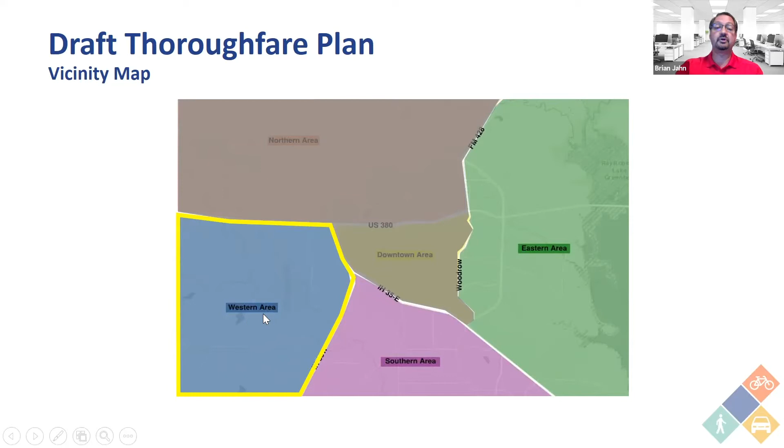Just a quick overview of the mobility plan update, what it is and what it isn't. It's 3 plans in 1. This is the first true mobility plan the City of Denton has undertaken, including the thoroughfare plan, which is primarily for vehicles, the bicycle plan, and a new element we have not had before, a pedestrian plan. The thinking behind rolling these into one plan is that they all connect at some point - people walk to a bus stop or walk to a destination.

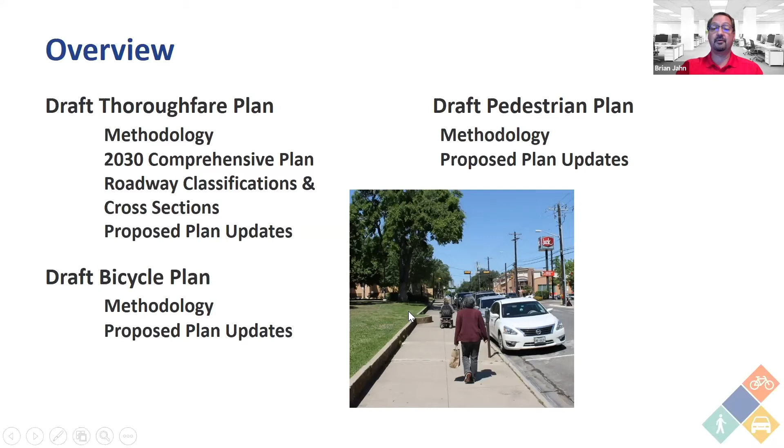All of the modes are interconnected, and it falls in line with the city's desire to move forward with a more complete streets oriented plan, so we see all 3 modes plus transit on the same plan. We try to update this plan every 5 years just to keep it current, as development changes and new opportunities arise. Again, we're including the bike and ped plans.

The primary focus of this mobility plan, and the thoroughfare plan in particular, is the reservation of right-of-way. We are trying to identify where we think future roadways need to be, and how big we think they need to be. As development occurs, we can secure that right of way, secure those infrastructure needs, and help build out our ultimate roadway, bikeway, and pedestrian plan.

It also positions the city to receive funding when the Texas Department of Transportation or the North Central Texas Council of Governments issues a call for projects. Having this plan in place and possibly having secured that right of way puts us in a better position to promote a specific project and secure funding from that third party. So each plan will focus on safety - that's always our number one priority.

We looked at providing better connectivity in this plan than the 2015 plan, again with that complete streets approach, trying to provide more multimodal options: pedestrian, bike, transit, in addition to the historically auto-centric thoroughfare plan. So let's jump into the thoroughfare plan and its process.

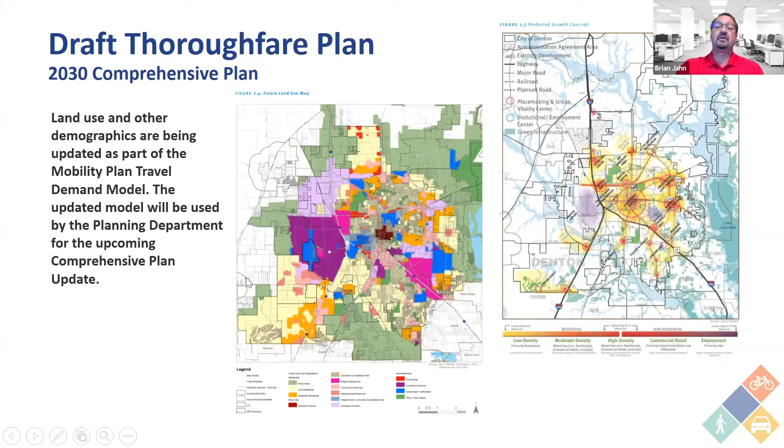So this is the kind of nerdy engineering portion. Just a quick introduction on how we develop our thoroughfare plan and its modeling process. We divide the city into little bitty zones, and each zone has population and employment estimates for, in this case, a 2045 build-out scenario. So we're looking at 2045 as our scenario of interest. Again, 25 years in the future: how many people will live here, how many jobs will be in place, and we divide that and disperse that across the city.

And then we turn that population number and those employment numbers into trips. So how many people will be entering a zone, how many people will be leaving a zone, either coming home or going to work, et cetera. We distribute those trips on the roadway system, and we get a lot of guidance from the North Central Texas Council of Governments. They have a regional model that is much higher level, so we really drill down into the weeds when we're looking at the city of Denton, and we'll distribute those trips between the different zones and externally.

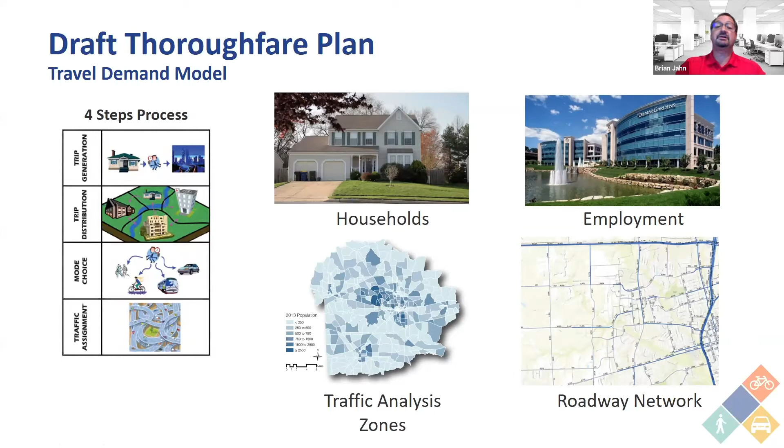So some people may live in Denton and work in Frisco, and we try to capture that. We will then determine an estimate of the mode choice. Are they going to take transit? Are they going to drive their car? Will they be on a bike? Will they be a pedestrian? Then we assign those trips onto a travel forecast model that we have built, representing all of the city streets in Denton. Again, we have the ability to tie into the regional model so that we can capture regional ingress and egress as well.

The next category is primary arterial. This is something like a University or a Carroll. It could be owned by the city or by TxDOT, but it's more of a city street appeal and description rather than a freeway or a controlled access facility. So you'll have traffic signals and intersections, you might have on-street parking. It could be 4 to 6 lanes wide, carrying 25 to 50,000 cars a day.

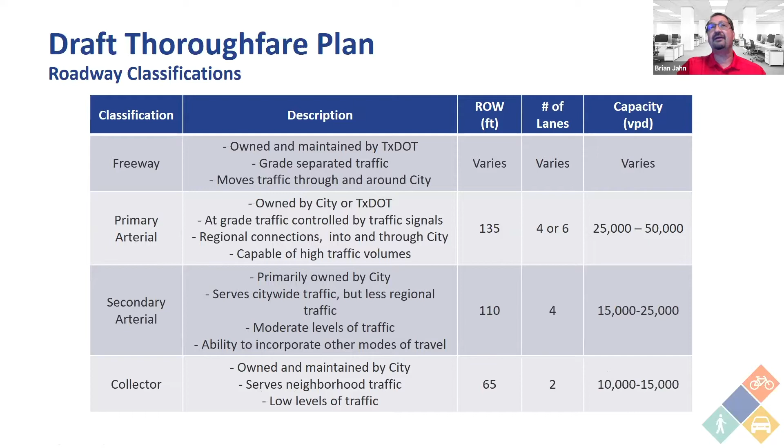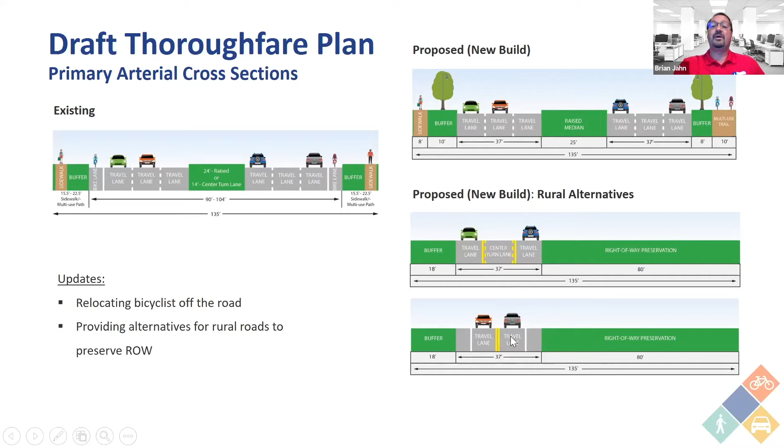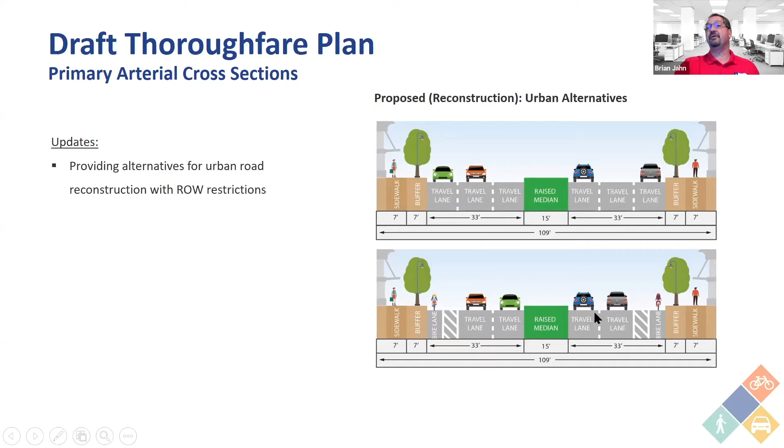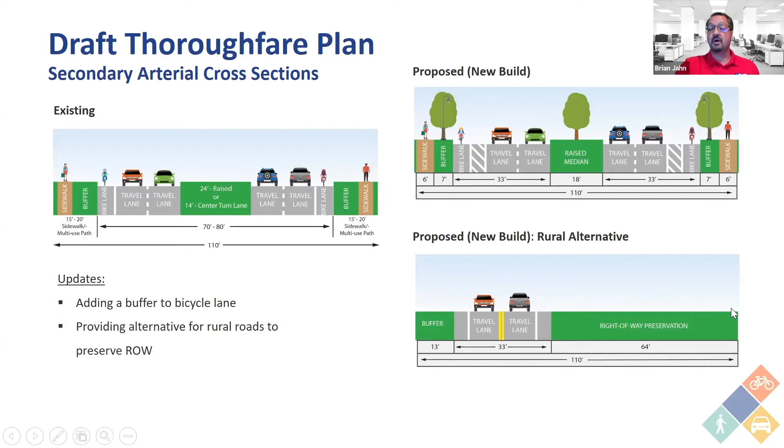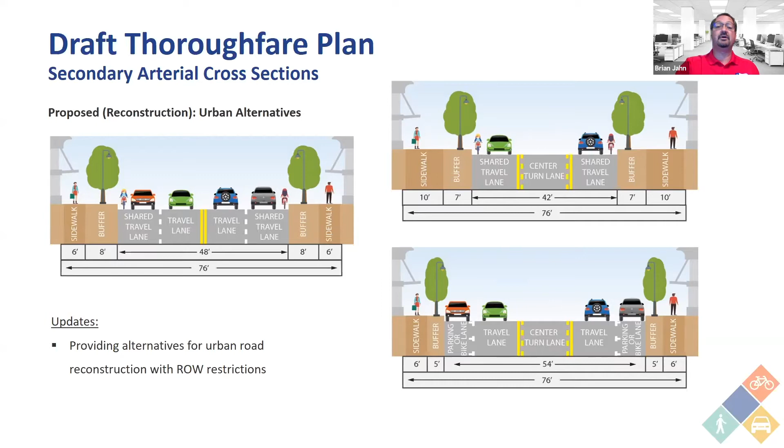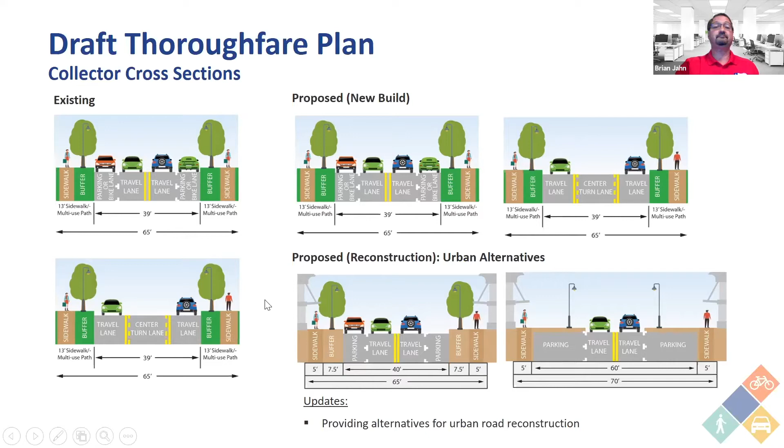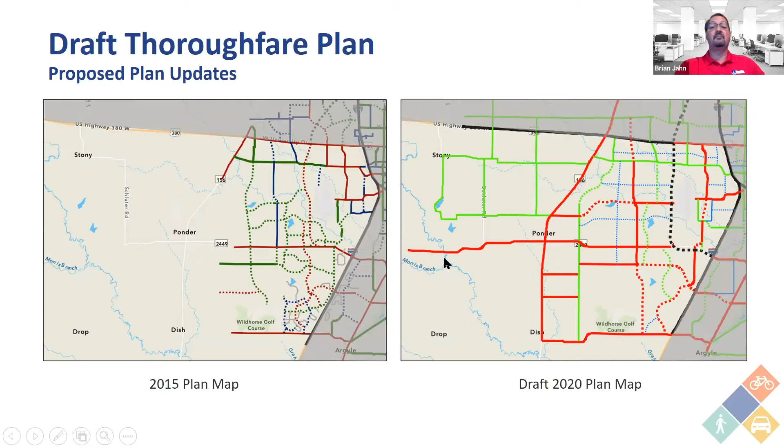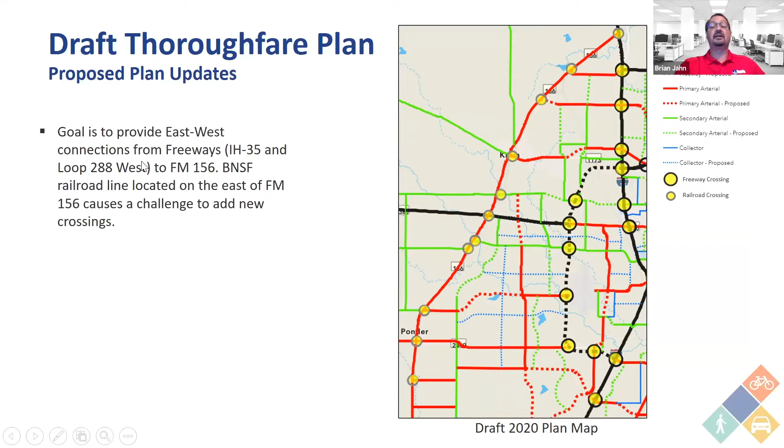What we'd like to do is go through some of each of these areas - this is showing some of the additional network that's outside of the city, in our ETJ or in other communities - just looking at what the total network is on the west side of the city. I'd like to go through a couple of these, and there's 8 of them, so we're going to go very quickly, just the highlights, the major changes that are occurring in this plan versus the 2015 plan.

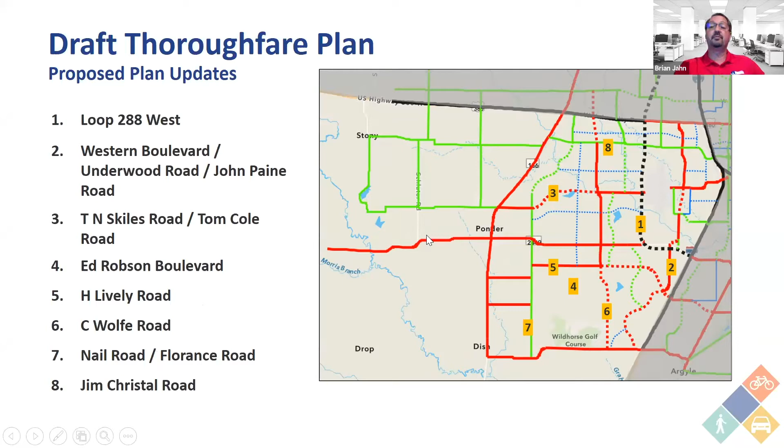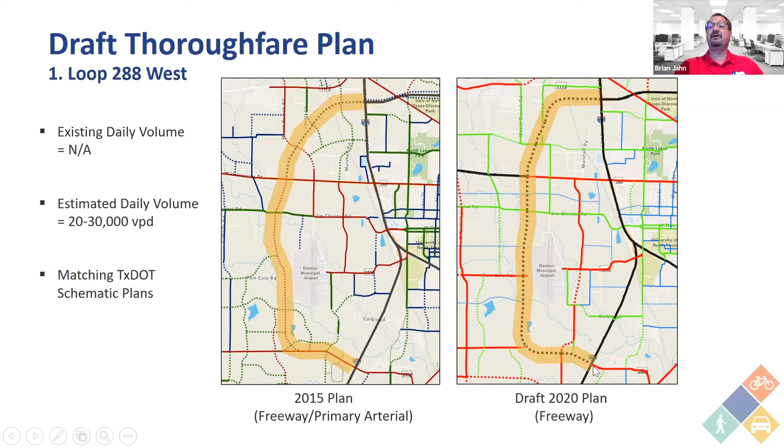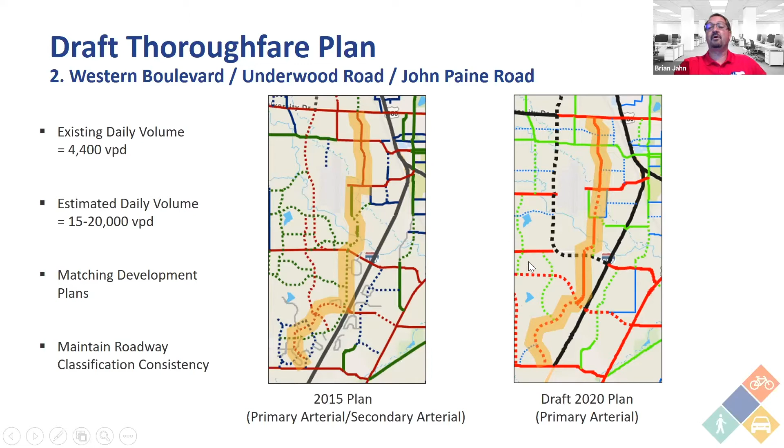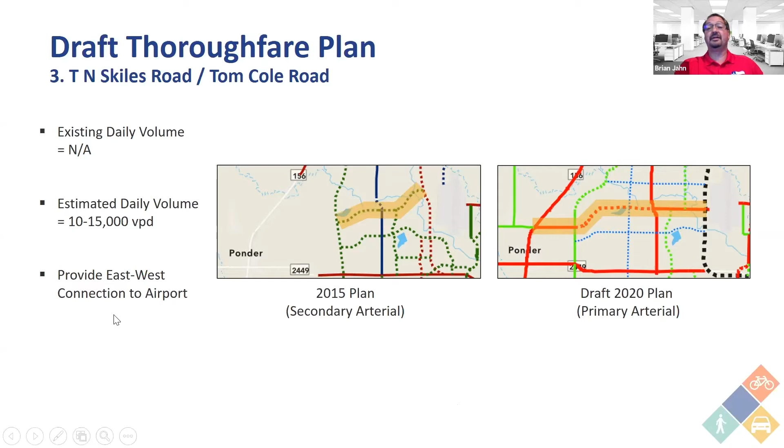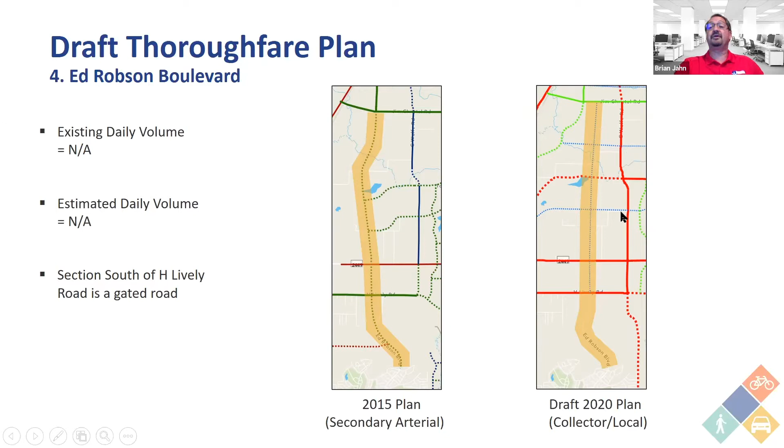Ed Robson Boulevard - in the 2015 plan we had this shown as a secondary arterial, but because in the 2020 plan, and we'll talk about this in a bit, C Wolfe is showing as a primary, then we're downgrading Robson Boulevard to a collector and local, because we've got the extra carrying capacity on that roadway to the east.

H. Lively Road - a lot of this is out in the county and in our ETJ, but in the 2015 plan we're showing that as a secondary arterial. We've realigned it slightly, just straightened out some of the curves, going between 35 and points west. We believe this corridor should be a primary arterial instead of a secondary, and so we're classifying it as such.

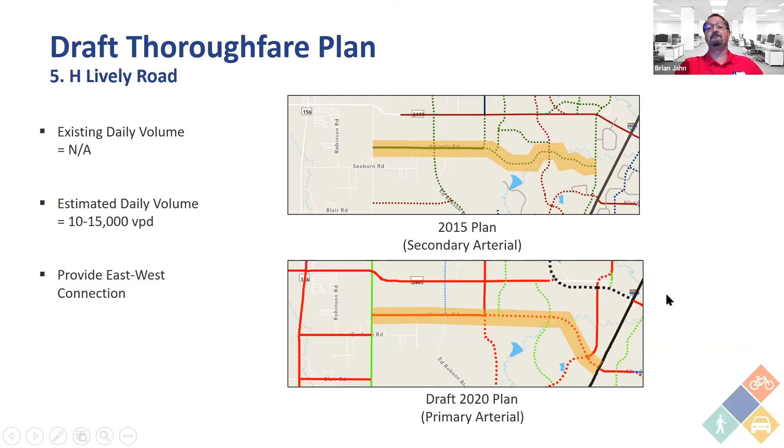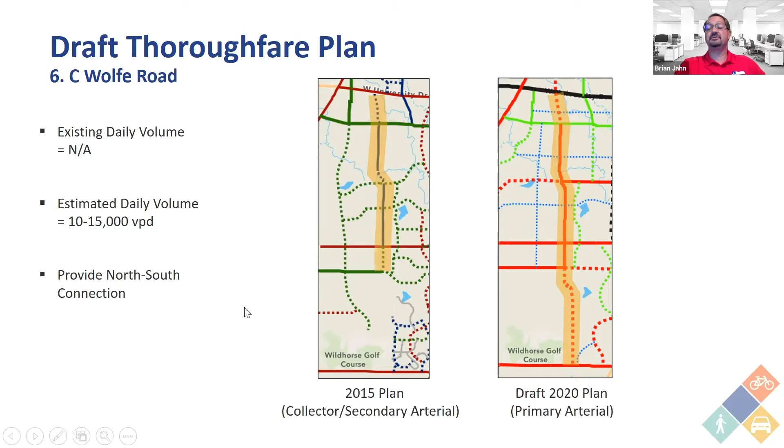C Wolfe, this is the north-south arterial that in the 2015 plan was shown as a collector or secondary. We've extended the reach all the way to the south, and this is associated with some of the Hunter Cole development, but reclassifying that as a primary arterial just because of the estimated volumes that we think will be generated and attracted to that facility.

Nail Road, Florance Road - again this is pretty far west, but we've kept that as a secondary arterial. The difference here is that we've realigned it to the west and extended it further south.

So again, trying to clean up some of that, adding that connectivity that the 2015 plan did not offer.

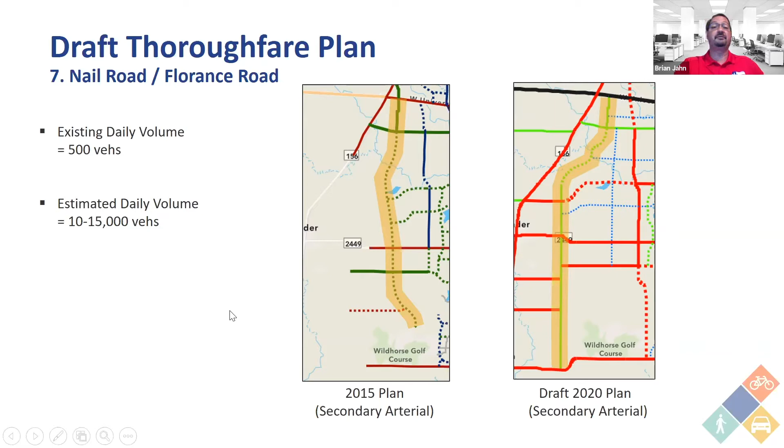And the last one is Jim Christal Road. We are reclassifying the eastern portion of this from primary to secondary. We have an issue of roadway consistency and classification consistency that we're trying to address. We had secondary arterial to the east, and then we had a piece of primary and then a secondary to the west. Based on our volume estimates and the carrying capacity of a secondary arterial, we think it's appropriate to just leave it a single cross section its entire length.

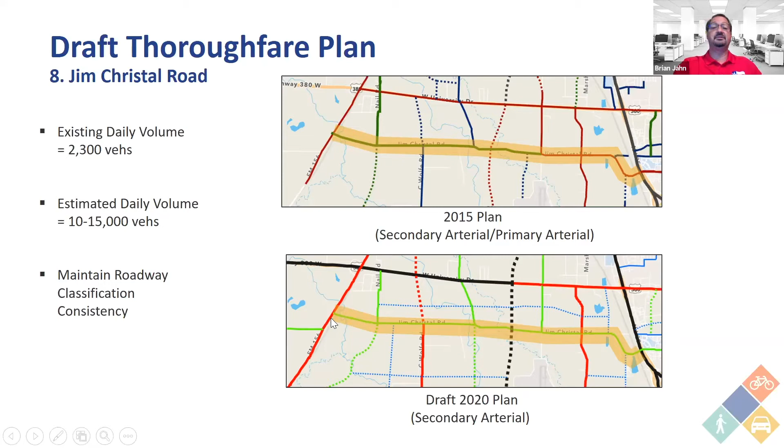So with that, I will open the floor. I'm going to stop sharing and open up questions and answers on the roadway. This is the thoroughfare plan piece of the mobility plan.

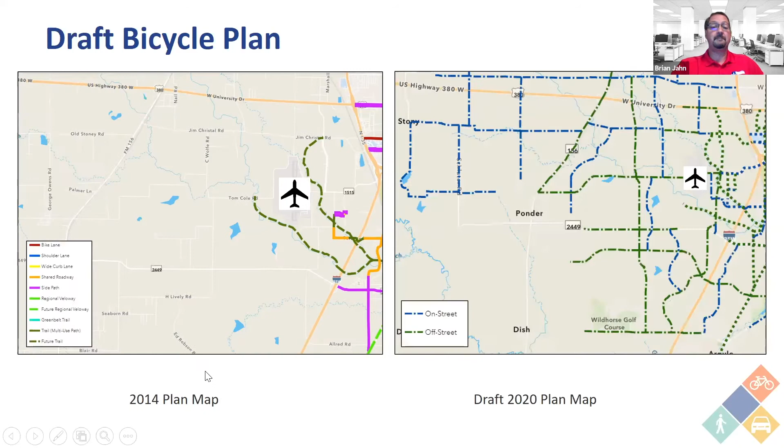So here's a comparison of the 2014 plan. Again, fairly limited access for bicycles versus the 2020 update, where we're starting to see some demand, and we certainly want to provide some additional infrastructure for cyclists.

Now, again, this is we're reaching here into some ETJ and into some county areas. This is Ponder, so that's obviously not under the jurisdiction of the city of Denton, but we're trying to show what we think the connectivity should be and what type it should be.

And if you'll look, the blue is on street, and that's a bike lane, buffered lane, or a shared lane, and the green is off street, so that's a trail or a side path. So you see about a 50-50 split.

So again, this kind of represents that move towards serving the higher percentage of the interested riders and providing them that stress level, that comfort level, that they're looking for as they enter into their bicycle trip.

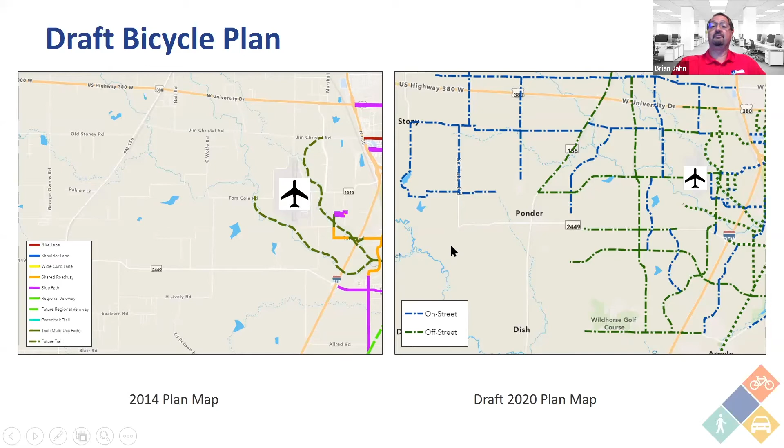So one of the other things that we're doing, the Denton Parks Department is currently in their Trails Master Plan update process, and we are trying to blend these two plans together.

So you've got Parks, which is primarily trails. The Parks Department will also install some side paths, versus this mobility plan, which truly addresses more street right-of-way and what goes into either on or adjacent to a roadway within that street right-of-way.

So this is kind of a combination overlaying the two plans together. Again, a lot of this is the Hunter Cole trail system, showing how that ties into the on-street or side path system that this plan is proposing.

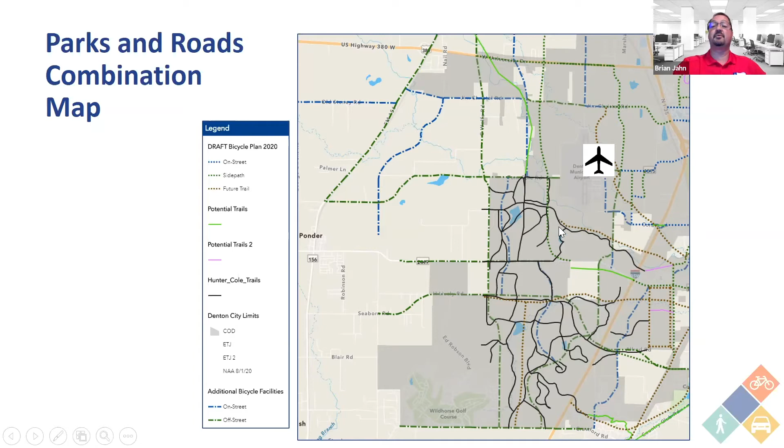All right, this first question is: did the land use assumed in the model incorporate the reduction in the number of homes negotiated in the amendment to the Hunter Cole MPC, or were these roadway traffic capacity needs computed based on a pre-negotiated population assumption?

I don't know. I can reach out to a resource here, Kurt Schulte. Okay, thank you. Can you answer? Sure. Oh, let me change my background real quick.

So while Kurt's doing that, I will say that the Hunter Cole was a moving target while they were negotiating while we were preparing this document. So I don't know if we got the final, but I'll let Kurt answer.

We did, Brian. We got the final population employment numbers. There was a traffic study done by another consulting firm, HDR, where they worked in pretty great detail with the developer to come up with those numbers. And then we had two separate meetings with them to get their numbers and incorporate them into the model. So I think they're fairly reliable, and the answer is yes, we incorporated that.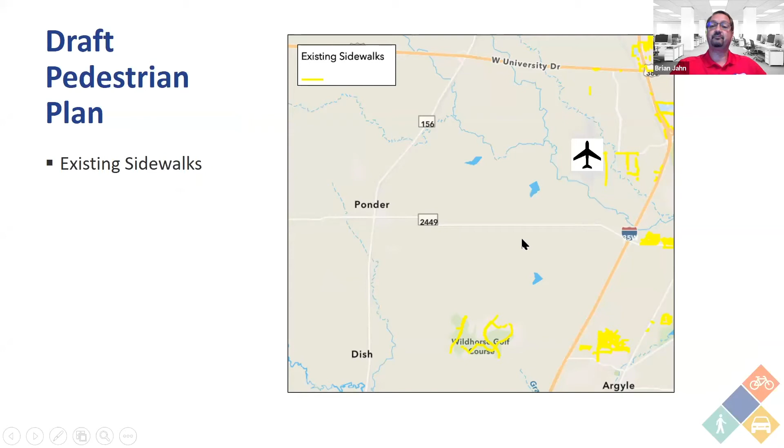And then here's our draft pedestrian plan. Again, still thin, but significantly higher than the existing levels. You'll see the red portions on the far right hand—those are our high priority projects. And then the orange, I won't call them low priority, I'm going to call them lower priority—there's no such thing as a low priority pedestrian element—but these are the sidewalks that we propose as part of this.

Now this does not include anything in the Hunter Cole project. All of the roadways located in that development will be required to provide sidewalk and accessibility. So what we're seeing here is a combination of the existing and the prioritized.

So let me go back if I can. Okay, just to discriminate between the red and the orange, we prioritized these based on adjacent land uses. Are they near a school? Are they near a transit facility? Do they have high populations of people that want to walk to the grocery store or to work?

And so, with the exception of the upcoming Hunter Cole Ranch, the existing residential population on the west side is a little bit less dense than we've got. That's part of the reason why we've got more orange than red—it just didn't meet that highest priority threshold as we calculated that demand.

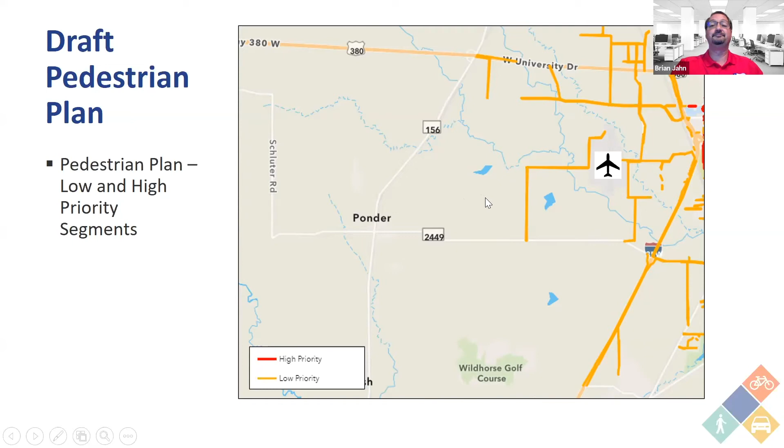So again, this is the combination of the existing and the proposed.

This does show a little bit more of the ultimate roadway. These are additional sidewalk facilities, the stuff in gray, that are associated with future roadways, and we could probably color those orange as well. But so many of these roadways are beyond the 2045 threshold for construction to their ultimate section.

And I'll take Schluter—we're talking about a potential arterial in this north-south direction, but that may not happen in the next 25 years. It's dependent upon development, and these roadways will be constructed as development occurs. So until that development occurs, we won't see that pedestrian sidewalk infrastructure constructed.

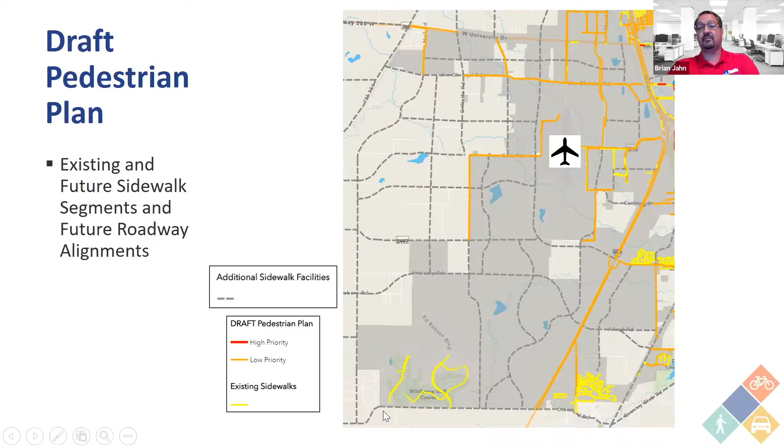So I'm going to go back because there should be a question slide. I'm going to stop sharing and see if we've got any questions on the pedestrian plan.

Okay, I thought we did answer the question. Let me go back to the last question.

So the question was, did the land use assumed in the model incorporate the reduction in homes negotiated with the amendment to the Hunter Cole MPC? And the answer is yes. We worked closely with their consultant, and we do have the current population employment projections associated with the current plan for Hunter Cole.

The next question is, when new roads are built, what can we expect for sidewalks? Is a sidewalk guaranteed on both sides or just one side? New roads can be constructed in several different ways.

If a development occurs on one side of a roadway, our ability to make them build the roadway is somewhat limited. Typically, if a multifamily or single family development has a perimeter street frontage, they are required to build half of that street and the associated sidewalk.